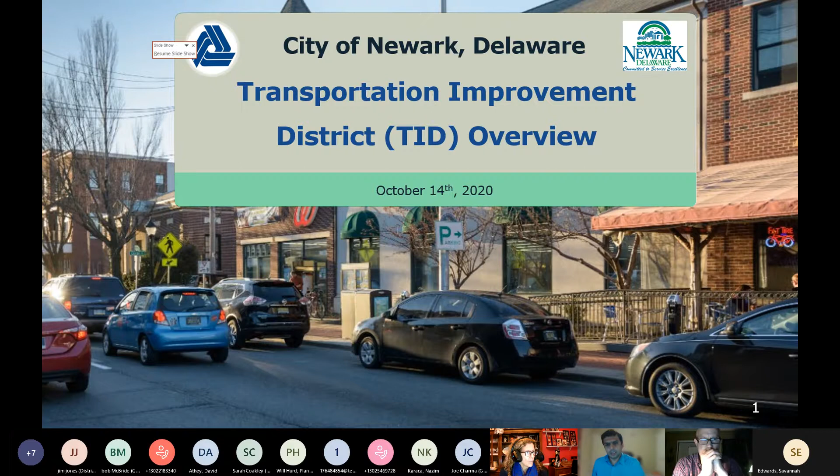With that, next slide please. On today's agenda we have 4 modules. We will have an introduction and background information on the Transportation Improvement District. Then we will go through the TID framework and key components. Some of the technical analysis that has been completed to this point, we will go through those. And the last module will be on next steps and what to expect after this.

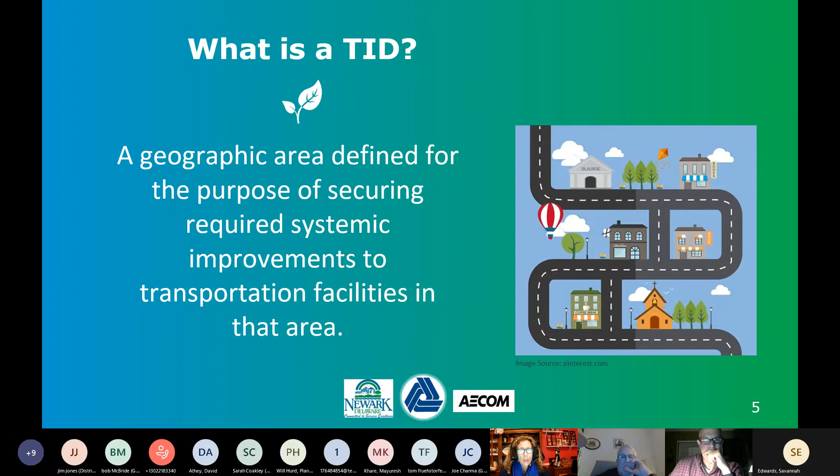The participating agencies develop a land use and transportation plan for the TID, identifying a projected build-out plan and a fee formula to fund the improvements, as well as a monitoring program to track the need for new projects. As projects are completed, they are incorporated into the TID agreement.

So how does the TID work? The development of a TID involves detailed work, which will be discussed in subsequent slides shortly.

The development of the TID involves forecasting increased traffic on transportation infrastructure due to development over time, and a fee formula to fund the improvements that developers pay into. This is done so that development can forego the traffic impact study process, whereby the threshold for requiring such a study is a development that generates 500 vehicles per day or more, and 50 vehicles per hour. That threshold, given Newark's comparatively small geographic size compared to New Castle County, is rarely met for a proposed development.

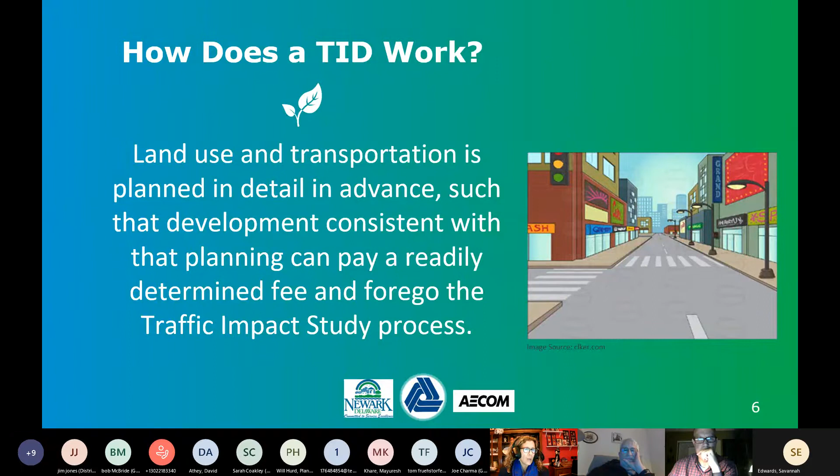But also so that all proposed developments in Newark, regardless of the proposed amount of traffic generated, will be required to take part in the TID.

There are several reasons why we feel it's a good idea to create a TID. These include the creation of a TID for the City of Newark being a goal in Newark's Comprehensive Development Plan 5. I'll talk more on this in the next couple of slides.

TID projects advance DelDOT's Capital Transportation Program, otherwise known as the CTP, which is DelDOT's plan identifying anticipated capital improvements over the next 6 years. Transportation projects identified in the Newark TID will advance in the DelDOT CTP, and as a result, get priority over other potential road projects.

TID fees stay local, whereby funds collected will be established in a fund to collect developer fees to be utilized on local roads for road improvements. Establishing the developer fee up front puts all developers on the same playing field, and they will know well in advance what the fee will be, which results in equitable treatment and known costs for developers.

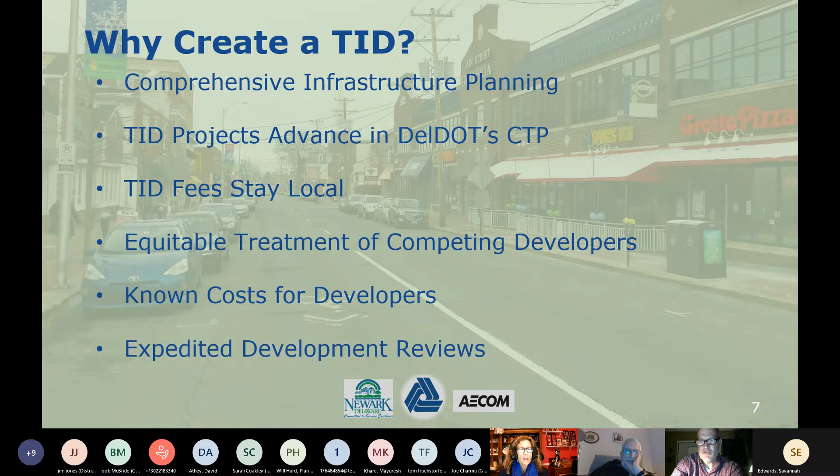Finally, as previously discussed, since the traffic impact study, which can take up to 3 to 4 months to complete, is no longer needed, development reviews can be expedited.

As I just mentioned, the development of a TID is a goal in Newark's Comprehensive Development Plan 5. This plan was adopted by City Council on September 26, 2016. The purpose is to better provide the systemic transportation improvements needed to support land development in locations identified as appropriate for development.

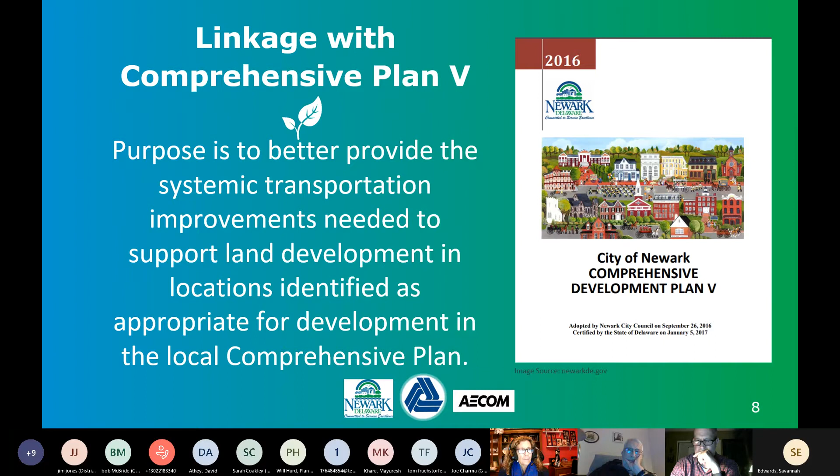Here's a screenshot of the goal for the Newark TID as described in the Comprehensive Development Plan 5, where the goal is to work with DelDOT to create a TID to reduce traffic congestion and prepare for future infill development by maximizing the efficiency of the existing transportation network. Maximizing the efficiency of the city's existing transportation network advances the city's vision as a sustainable community by reducing both traffic idling time, thereby improving air quality, and the need to widen or construct new roads, which is not only cost efficient but also preserves open space.

The Comprehensive Plan 5 articulated that the TID be comprised of the downtown area as described in the map on the screen. However, in talking with staff, DelDOT, the Planning Commission, the TID Steering Committee, and City Council...

The comprehensive plan articulated that the TID be comprised of the downtown area as described in the map on the screen. However, in talking with staff, DelDOT, the Planning Commission, the TID Steering Committee, and the City Council, all agreed and ultimately adopted the boundary map, which will be discussed, that given the current and projected growth patterns of the City of Newark, it made sense to increase the boundaries beyond the downtown area.

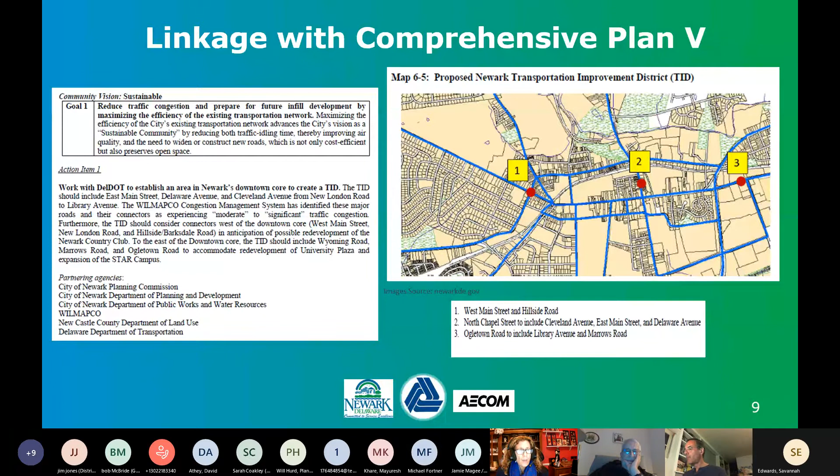Newark isn't the only governmental entity in Delaware that has done or is in the process of developing a TID. Currently, there are 4 operational TIDs, indicated in purple on the map: Hyetts Corner, Southern New Castle County, Westown, and Eastown. Those are all in New Castle County.

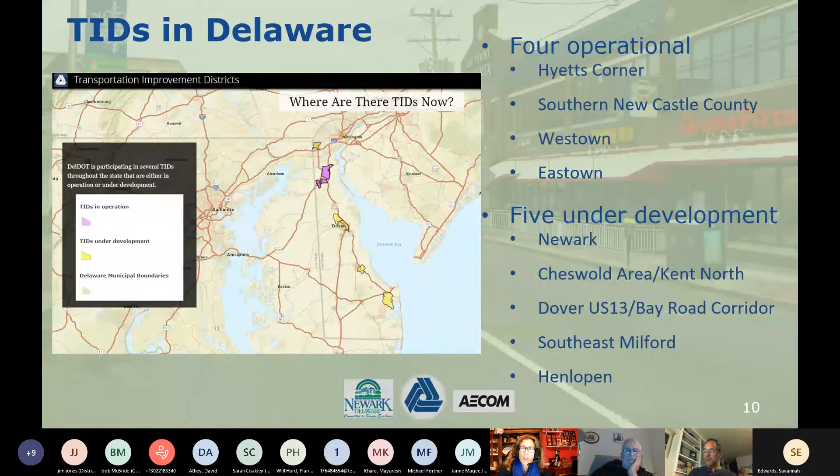As described above, the development of the TID is a process. Before we could start this process, the planning and development staff started meeting about half a year after I came on board, which is about the spring of 2017, to discuss the TID process and what we can do.

We then started meeting with Sarah Coakley from DelDOT and her staff. Discussions commenced with the Planning Commission in June of 2018, and then with the City Council for their review and input on the overall TID process and general makeup of the TID committee. The formation of the committee was approved by City Council on October 8, 2018.

Special attention was paid to ensure a diverse group of stakeholders was brought to the table. The stakeholders include city staff from Public Works and Water Resources, the Planning and Development team, WILMAPCO, Bike Newark, the representative from Bob McBride who is also presenting this evening, the Planning Commission, the City of Newark Police, and the Downtown Newark Design Committee.

The stakeholders also include the Development Community, University of Delaware, DelDOT, New Castle County Government, and Newark residents from each of the 6 city council districts plus 1 mayoral appointee. One of those district representatives, Jim Jones, is also joining us this evening as a presenter.

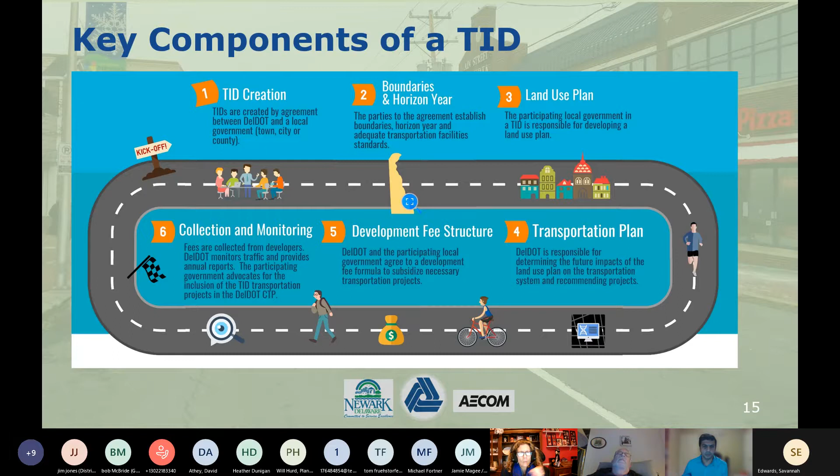TID is implemented through fee collection and DelDOT traffic monitoring and reports, basically updates to the conditions within the TID. Local government assistance is put together for prioritizing TID improvements for inclusion in the DelDOT CTP, or Capital Transportation Program. So it's a collaborative process between DelDOT and City of Newark, not just at the beginning of the process, but also once the TID is established, it is an ongoing process.

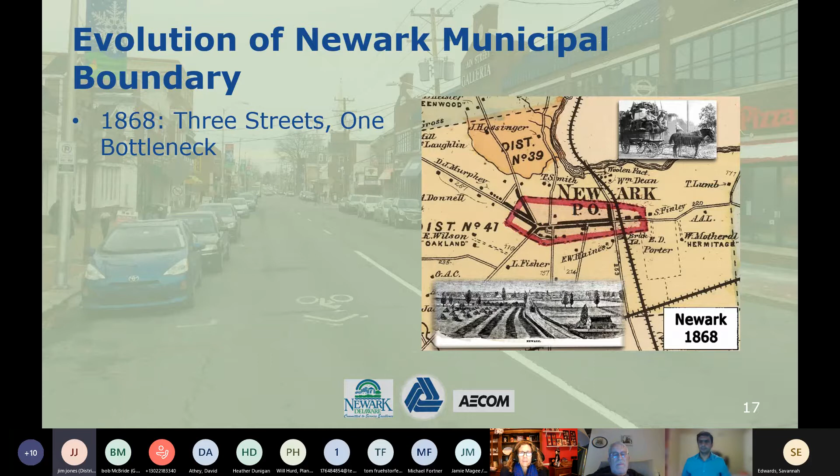The slide there shows 150 years ago, when the problem of traffic in Newark was a lot simpler. There was one main street, a couple side streets, and there's no historical record to suggest any traffic congestion at all. The area around the town was surrounded by farms, so perhaps on market day you might have had some horses and wagons getting into a bottleneck up at what we now know as South College Avenue and Main Street, but by and large, traffic wasn't an issue.

Next slide, please. Looking back 80 years after the invention of the automobile, by just before World War II, automobiles were relatively common, and so were traffic problems.

The map actually shows some of the attempts to deal with it within the boundaries of Newark, which are shown there in red. You can see a couple streets in white: Cleveland Avenue, Delaware Avenue, and Park Place, which offered alternative routes across town from east to west. You can also see a couple of guys on motorcycles there to enforce some of the new laws, like you couldn't just pull across the street on Main Street to go gas up in whatever direction you wanted. So there was a combination of regulation and then actually some public works improvements.

Still had a big problem though, which is you had railroads surrounding 3 sides of the town and White Clay Creek, so there was a limit to how much you could actually fix within the town limits itself. Next slide, please. And next slide, please.

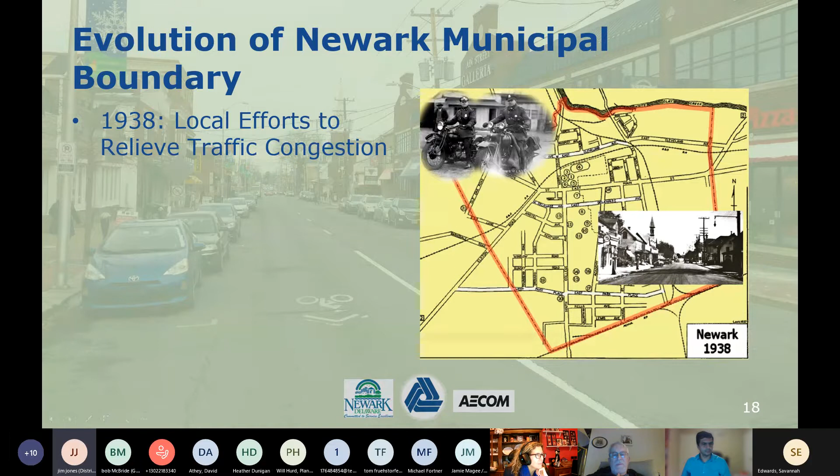There we go. This is actually history nowadays - this is 50 years ago, if you can imagine. You can see that the development of other parts of New Castle County wound up having a big effect on traffic here in Newark. Those purple areas that you see are all farms that got turned into housing developments. And if you looked at a modern map, you'd see there's a lot more purple and a lot less rural space. But the road network, with the exception of I-95, didn't change.

In other words, roads that dated back from the 19th century were trying to handle all the new traffic flow. It also meant that a lot of the traffic was generated from outside of town. So efforts to solve traffic problems within Newark have to take into account what's going on outside of Newark. And therein lies the difficulty of coordinating between the city, county, and state, and even adjacent states in order to fix things. So the TID is an attempt to deal with that.

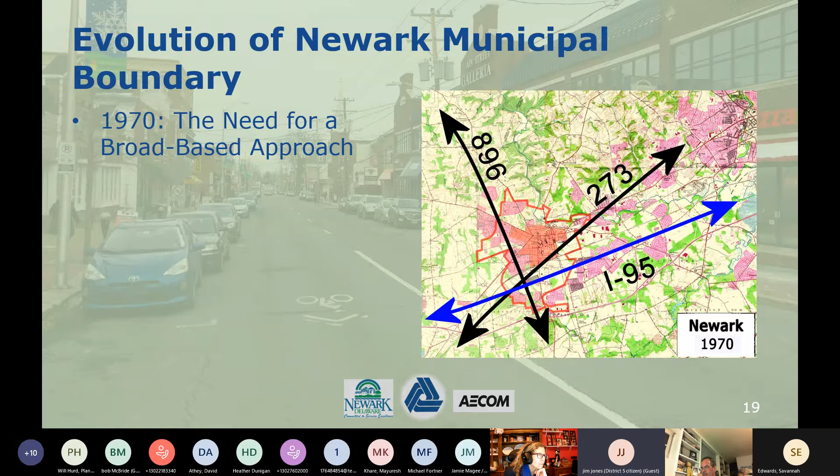Next slide, please. All right, this shows the map that we came up with, the boundaries that the committee is going to propose to City Council for approval. The yellowish area that you see is the actual limits of the City of Newark today.

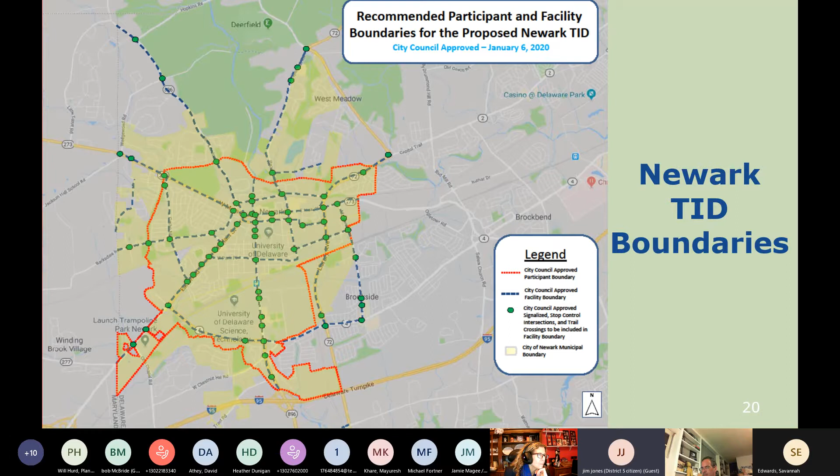The red boundary is the participant boundary, which encompasses the area where we think development might happen within the next time period. So those are the people that have a stake in trying to solve this problem. And then the blue dashed lines and the green circles represent roads and intersections where improvements could be made that would have an impact on traffic here in Newark. So that's my contribution here. I think we go to the next slide and you can take over again.

I'm again checking if Sarah is back on. Our sincere apologies. Hi, good - can you hear me now? Yep. Oh my goodness, good to hear. Sorry about that.

All right, thank you, Jim. Now I'm going to summarize the facilities that are included within the TID.

There are several key roadway segments for which we did some analysis already that I'll get into later. These key roadway segments include State Route 72 and State Route 2, from State Route 4 to Possum Park Road; State Route 896 from the municipal boundary to the Maryland-Delaware line; State Route 4 from Elkton Road to Maris Road; State Route 273 from Wedgwood Road to Possum Park Road; and Elkton Road from the Maryland-Delaware line.

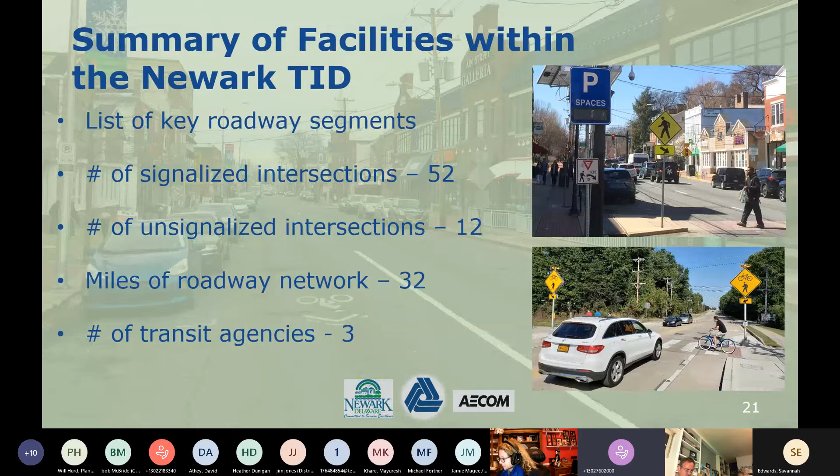There are a total of 64 intersections within the TID, including 52 signalized and 12 unsignalized intersections, and approximately 32 miles of roadway network included in the TID. There are three transit agencies that provide public transit services in the TID area, and the recommendations from the recent Newark area transit study will be considered for inclusion in the TID.

Now I'm going to turn the presentation over to Bob McBride, TID committee member, who's going to go over the committee's recommendation on the target horizon year.

Hi, I'm Bob McBride. I'm a resident of District 1 in Newark, and I represent Bike Newark as the chair. What we were tasked with was coming up with a horizon year to see how far ahead we could anticipate traffic, population, and other planning needs for Newark.

As we considered it, the standard planning practice of looking 25 years ahead seemed about right to us as a group. During the past 25 years, Newark has only grown larger and increased in population. In this next 25-year horizon, we don't expect the land area of Newark to grow much larger, although it might, but the population and land use will likely change with at least some growth. This impacts traffic flow, even if the vehicles we're using tomorrow are very different than the ones we use today.

We think that as long as we can amend the future year at any time as part of the TID, the committee recommends that we use 2045, or 25 years in the future, as the right number for our transportation improvement planning for Newark.

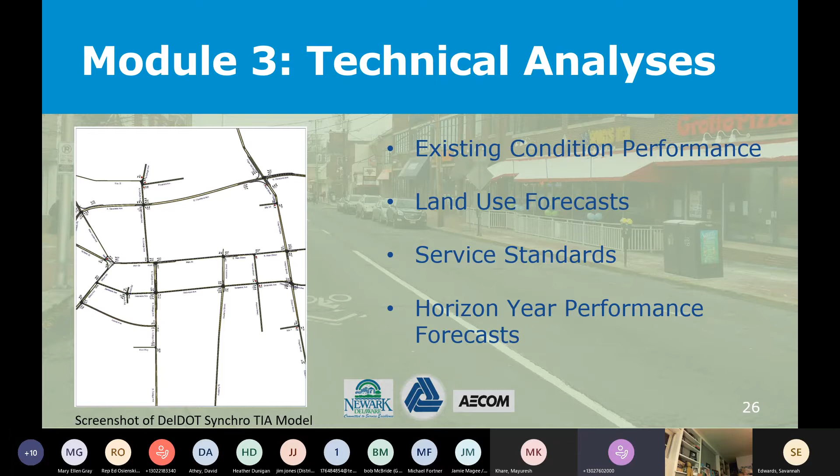The purpose of the existing conditions analysis is to serve as a baseline with which to compare the future land use and transportation scenarios. DelDOT used the Synchro traffic impact analysis model to determine the existing intersection delay and travel times along 5 key roadway corridors. The analysis included signal optimization at all signalized intersections, which assigns green time to the approaches based on the percentage of capacity used, so the higher traffic approaches with less capacity remaining get more green time. The analysis was based on traffic counts conducted in September of 2019.

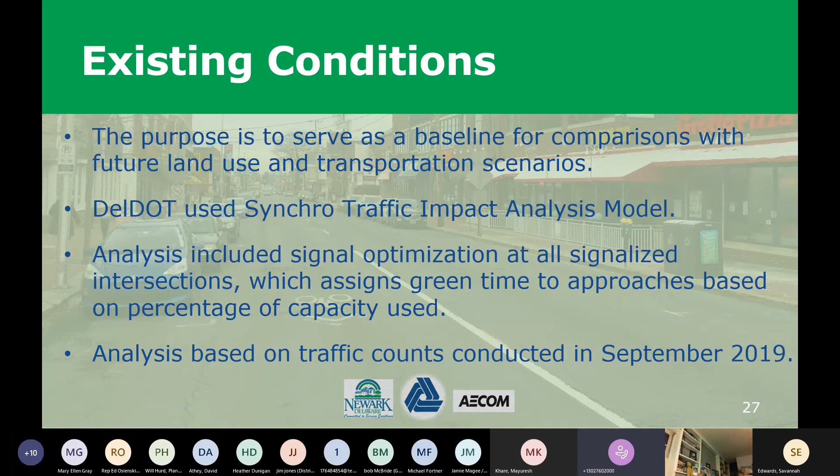This slide shows the existing intersection delay during the weekday morning peak hours of 7 to 9 a.m. For this slide and the next one, the meaning of the symbols is as follows: the square symbols on the map are the signalized intersections, the diamond symbols are the all-way stop controlled intersections, and the triangle symbols are the two-way stop controlled intersections.

The green symbols are the signalized or all-way stop controlled intersections with overall average level of service E or better, and the two-way stop controlled intersections with level of service E or better for all of the stop controlled approaches. This means an average of 80 seconds of delay or less at signalized intersections and 50 seconds of delay or less at unsignalized intersections.

The orange symbols are the signalized or all-way stop controlled intersections with overall average level of service E, but with one or more approaches with level of service F. This means at least one approach exceeds 80 seconds of delay at signalized intersections or 50 seconds of delay at unsignalized intersections. The red symbols are the signalized or all-way stop controlled intersections with overall level of service F, average delay exceeding 80 seconds at signalized locations or 50 at all-way stop controlled intersections. Also, two-way stop controlled intersections with at least one stop controlled approach at level of service F.

There's one signalized intersection, Capitol Trail and Cleveland Avenue, that is overall F in the morning peak hours currently. It has an average delay of about 154 seconds, and it's the eastbound approach that is making the greatest contribution to that delay. There are also two signalized intersections that have overall average delay of less than 80 seconds, but have at least one approach that exceeds 80 seconds of delay: the intersections of 896 at Welsh Tract Road and Inspiration Boulevard, where it's the eastbound approaches at both that exceed that 80 seconds of delay.

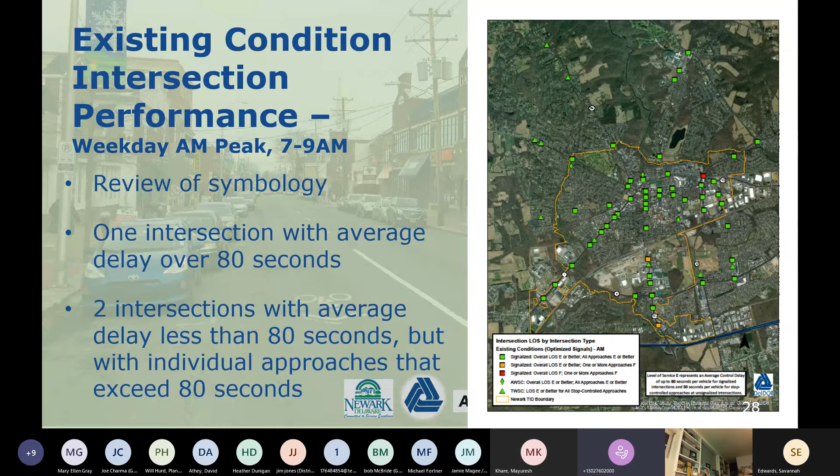This slide shows the existing intersection delay during the weekday evening peak hours of 4 to 6 p.m. As you can see, the p.m. peak period is worse than the morning peak period, and this is common in urban areas such as Newark. There are two signalized intersections with overall level of service F, more than 80 seconds of delay.

These are the Capitol Trail and Cleveland Avenue, Woodlawn Avenue intersection, both the eastbound and westbound approaches, with an average intersection delay of 187 seconds. Then the Elkton Road and Route 4 intersection, the northwest and northeast approaches, that are causing the delay there, with an average of 104 seconds of delay for that intersection.

There's also one two-way stop-controlled intersection with at least one of the stop-controlled approaches exceeding 50 seconds of delay, and this is the intersection of Marrows and Kensington Lane, the westbound approach, with a 60-second delay. Then there are 6 signalized and 1 all-way stop-controlled intersection that have at least one approach that is level of service F, exceeding 80 seconds for signalized locations or 50 seconds for stop-controlled.

These are the following intersections: State Route 896 at Welsh Tract Road, Discovery Boulevard, North College Avenue, and Cleveland Avenue. Also 896 at Inspiration Boulevard, Capitol Trail and Possum Park Road, Library Avenue and Wyoming Road, and South Chapel Street and Wyoming Road.

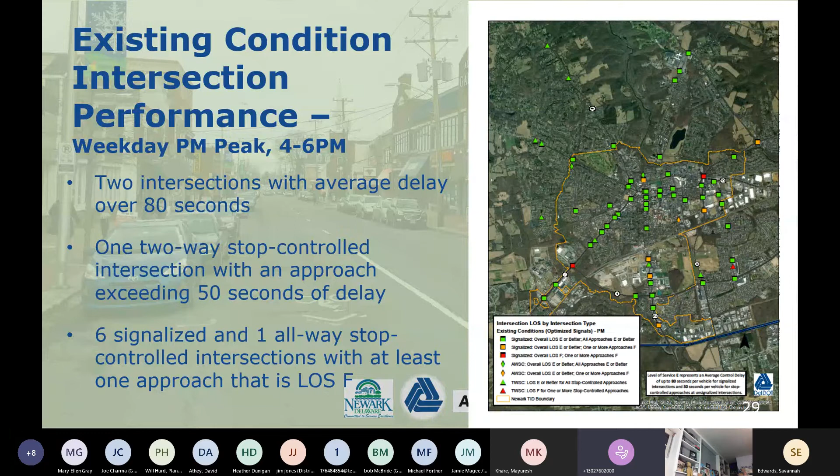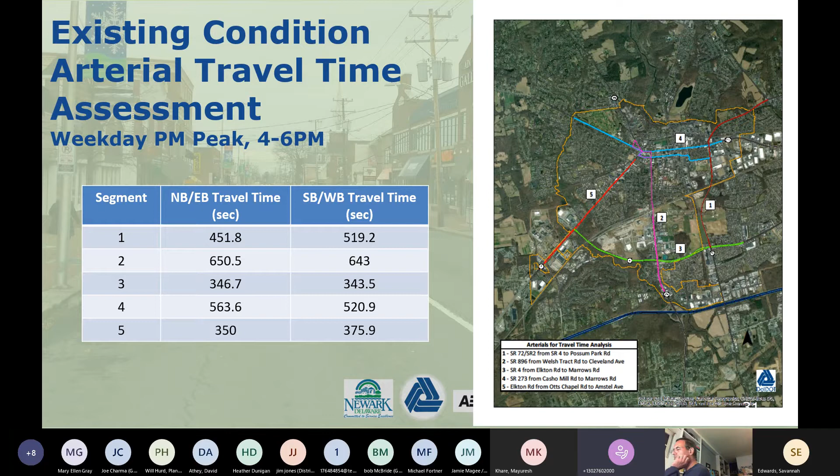Thank you so much, Sarah. One quick clarification, the numbers that you see in the table are all in seconds, and they also are with decimal points, because of the technical analysis that was conducted. These are all very detailed level results. What Sarah is explaining is basically it's easier for us to understand travel time in minutes and seconds rather than just seconds. So there is some discrepancy between the numbers in the table versus what Sarah is saying, but Sarah is making it easy for all of us to understand in terms of minutes and seconds.

Having said that, are there any questions related to existing conditions analysis? I know this is a lot of technical information in terms of both performance for intersections as well as travel time along certain segments and corridors. Any specific questions on existing condition performance based on your experience as residents of Newark?

Okay, I will ask a question for the benefit of the group. Sarah, you mentioned basically signal optimization and how signalized intersections are optimized for getting these results. So what exactly is signal optimization, and are the City of Newark signals currently optimized for the most part?

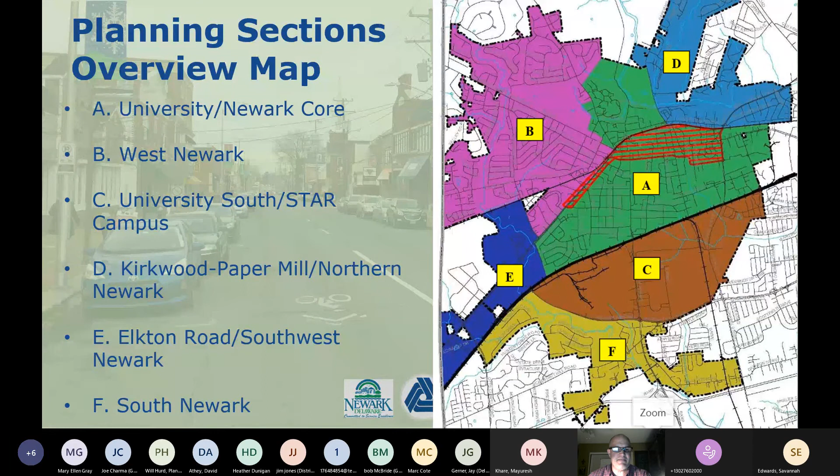This slide shows the projected net development of each planning area, and the net increase in residential units and the net increase in commercial spaces. As you can see, a significant amount of the projected increase in units and commercial areas is projected for planning section A, which is shown here in green. This includes our downtown, which we anticipate significant future redevelopment, and also around the college campus, particularly a lot of student units, apartment units targeted to students are being redeveloped from lower density uses.

We also see a lot in C, where we have the Star campus. It's shown here in kind of a brown color. We have the Star campus, lots of new commercial footage happening there. And also, there's less growth projected on the outer areas of the city, where there's more single-family development.

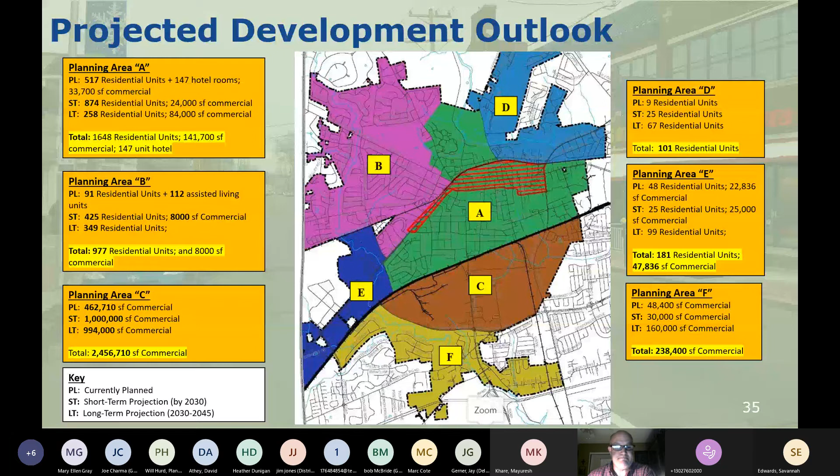One possible exception to that for future development is the Newark Country Club, which we modeled for in this area if it redevelops, likely into single-family houses. And we included that in the TID model, and it would be part of the funding, part of the fee program. Go ahead and go to the next area, please. Next slide, please. Thank you.

This slide, what I try to show is sort of the hotspots of current and future development, shown inside the circles. So those areas specifically are areas that we see or anticipate seeing future growth, significant growth, currently hotspots and into the future. Areas outside the circle, while there will likely be some development and redevelopment projects over the next 25 years, are not anticipated to grow or redevelop as intensely as in the areas in the circles.

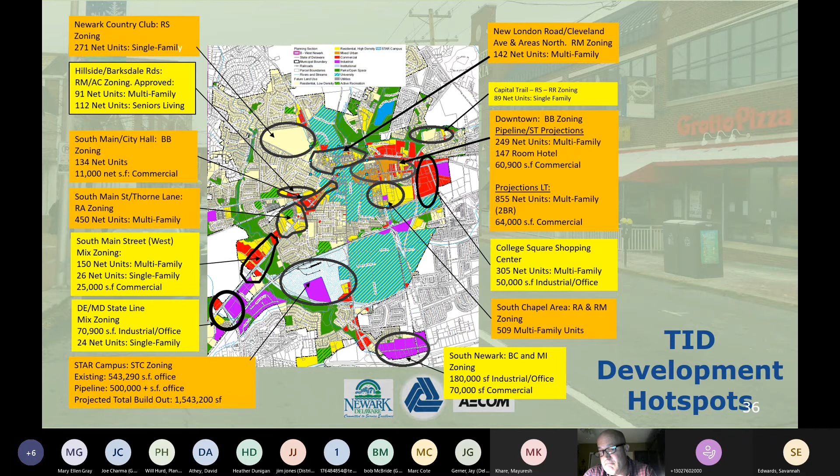Again, with this kind of hotspot map, we see a lot of the hotspots focused on the center core of the city around downtown and around the University of Delaware campus and along South Main Street, going east-west or southwest, south-north, outside the city towards the Maryland state line. And of course, there's the Star campus, which is a very significant growth area. And in the model, a big factor could be the redevelopment of the Newark Country Club golf course, you see in the north part of the city, into a residential development as well.

And that concludes my presentation.

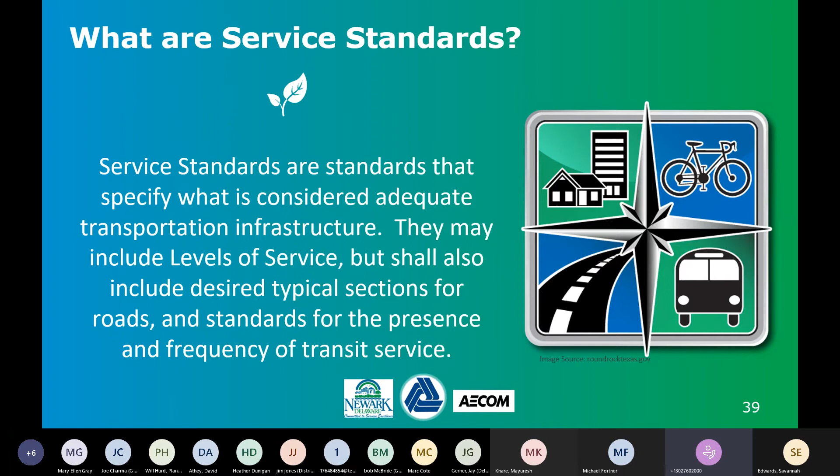The standards should be set collaboratively by DelDOT and the local government, including some measure of public involvement. That is the primary purpose of this public meeting tonight, and people will have the opportunity to comment online as well, just to get feedback on the draft service standards. So the TID committee has agreed to present these draft service standards this evening for public feedback.

The next is a standard for intersection control delay during peak periods for two-way stop controlled intersections. The standard there is a maximum of 50 seconds of delay for the left turns from the major street. Also included as a capacity standard is a travel time standard, allowing a maximum increase of 5% in the total travel time per segment for the 5 key segments we reviewed existing conditions for earlier. The travel time standard is to be applied after first considering the intersection delay standards.

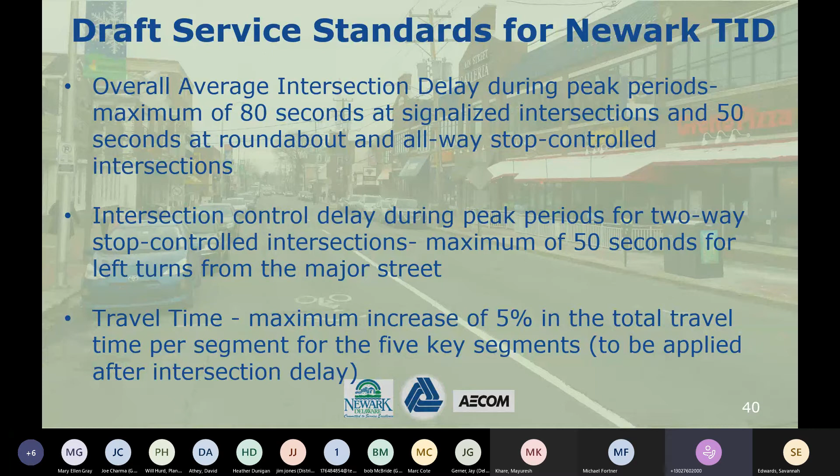Also, for the intersection delay standard only, intersections that exceed the delay standard under existing conditions shall have improvements done first, not funded through the TID, to reduce delay to the standard. There's one intersection that meets that criteria, which is Cleveland, Woodlawn, and Capital Trail. The thought behind that exception is that because it's an existing problem, with an existing level of service F and almost 3 minutes of delay there already, the committee didn't feel it was right to recommend that future development pay for an existing problem.

For geometric standards, the use of posted speed limits is assumed. The DelDOT functional classification map and applicable DelDOT design standards, our complete streets policy, are assumed for the identification and design of improvements on state roads. For typical sections on state maintained roads, the following minimum widths are required: 10-foot through lanes, 10-foot turning lanes, except two-way left turn lanes which must be a minimum of 12 feet wide, and 15 feet for a right turn lane if a 5-foot bike lane is included. Shoulders are 5 feet on local roads, 8 feet on collector and minor arterial roads, and 10 feet on principal arterial roads. City of Newark regulations, requirements, and standards shall be used for all city-maintained roadways.

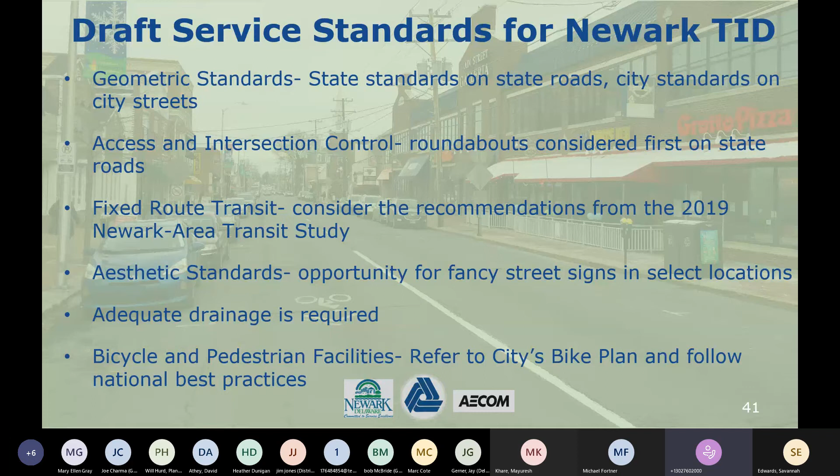Finally, for bicycle and pedestrian facilities, the city's bike plan will be referenced when making design decisions related to bike facilities. Existing and proposed pedestrian crossing treatments should be evaluated and designed using national and local research, and the preferred design is to incorporate a median refuge island to create a two-stage crossing.

And now I'm happy to answer any questions regarding the draft recommended service standards.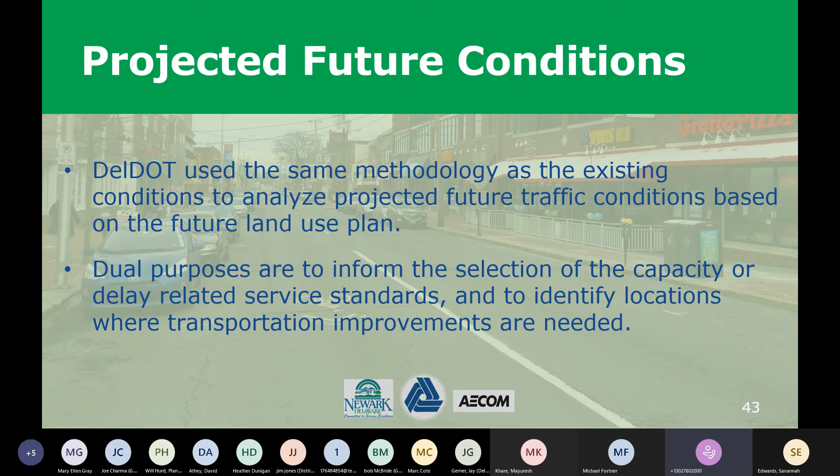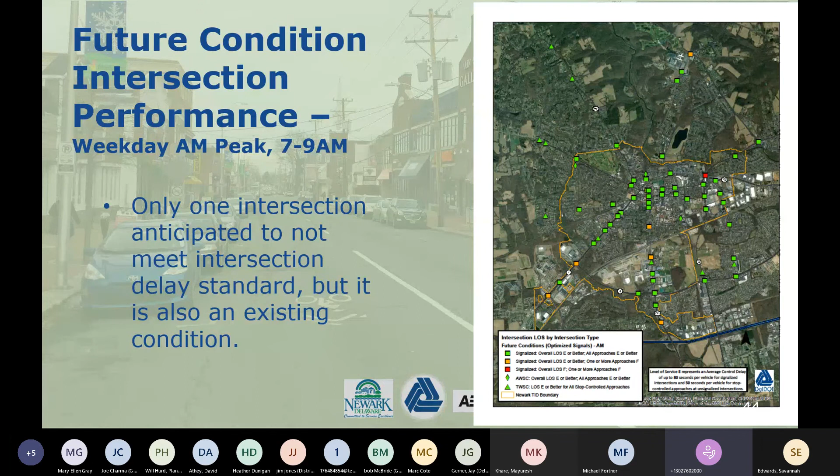This map uses the same symbology as the existing conditions intersection delay map to show the anticipated future intersection delay in the weekday morning peak period. There's only one intersection not anticipated to meet the intersection delay service standard, and that's Capitol Trail and Cleveland Avenue Woodlawn. However, this intersection is already not meeting the standard in existing conditions, so it meets the exception in the draft service standards that it shall have other improvements done first, not funded through the TID, to reduce delay to the standard. That way, future development is not held responsible for fixing a pre-existing condition.

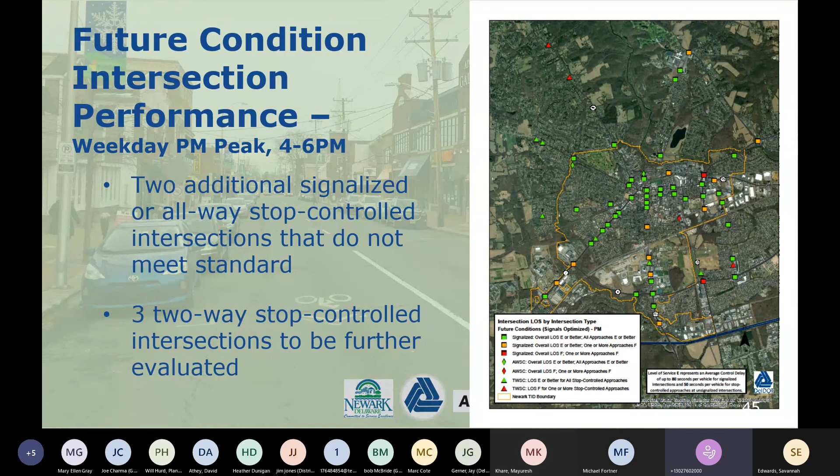There are also three two-way stop-controlled intersections that have at least one approach that does not meet the delay standard: Marrows Road and Kensington Lane, New London Road and Hopkins Bridge Road, and New London Road and Wedgwood Road. While it's the minor approaches that have delays exceeding the standard, we need to evaluate these locations further to make sure the left turns from the major approaches meet the standard, and also to make sure there are no safety issues as a result of the anticipated delays on the minor approaches.

This slide shows the travel time results for the weekday evening peak period. Similar to the morning peak period, with the exception of segment 5, Elkton Road, the travel times increased. Elkton Road experienced a decrease in travel time along the through approaches, again because of signal optimization, which gives more green time to the lower capacity approach. Basically, there's so much increased traffic expected along Elkton Road that the signal optimization gives more time there. We also have a project under construction there very soon that's expected to improve conditions along Elkton Road.

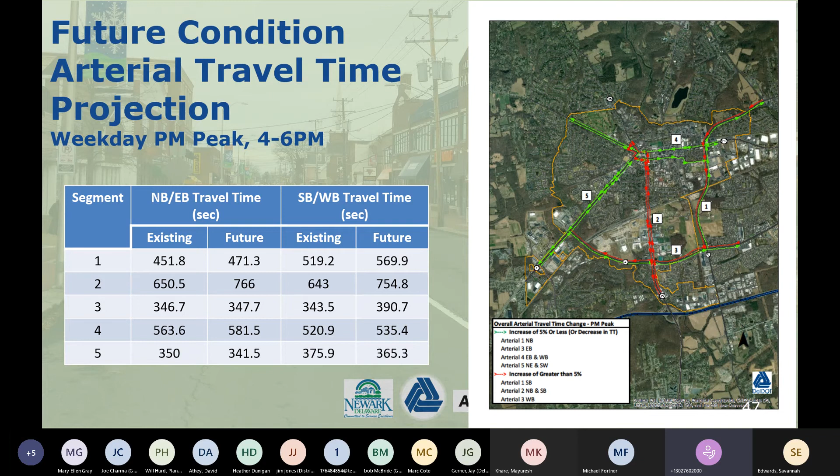The map shows the segments and directions of segments anticipated to exceed the 5% increase in travel time standard. These include both directions of 896, the southbound direction of 72, and the westbound direction of segment 3, which is State Route 4. I'm happy to answer any questions about the future condition analysis.

Thanks, Sarah. Any participants on the future condition analysis? I know there's a lot of information to digest. The TID committee has been looking at this information over the last few months, and we are presenting some of this information in an hour and a half right now. Feel free to revisit this presentation on the city's website. If you have any questions, please feel free to ask them.

At this moment, I will ask one quick question related to the future condition analysis, Sarah. A key question is whether implementation of a TID will accelerate development or redevelopment in Newark. What was the experience? I know earlier Mary Ellen showed examples of some operational TIDs in Delaware. Is there experience showing that implementation of a TID accelerates development or redevelopment within an area?